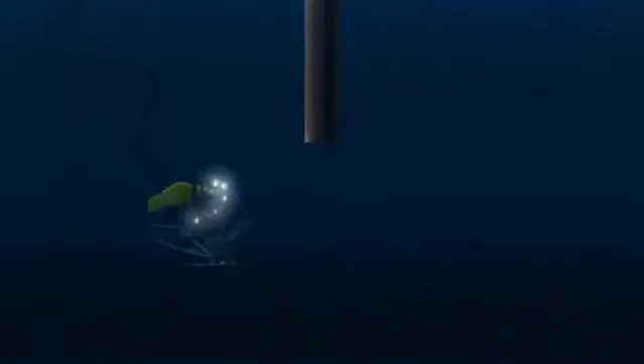Offshore drilling rigs have all the functions of onshore rigs, but also need to stay on station in a variety of sea states and allow for secure connections between the surface and the sea floor. To start an offshore well, a thick-walled, large-diameter hollow tube called a conductor is embedded in the sea floor, with the aid of a bit that jets away the sediment with high-pressure seawater.

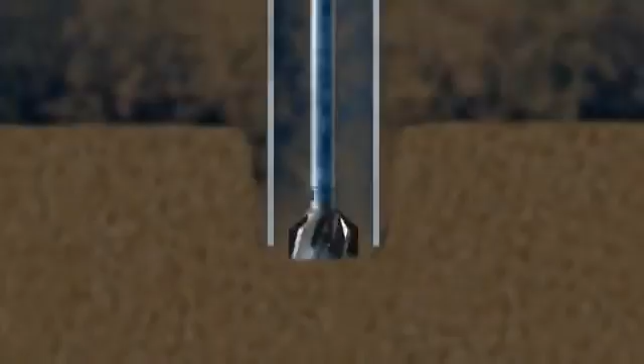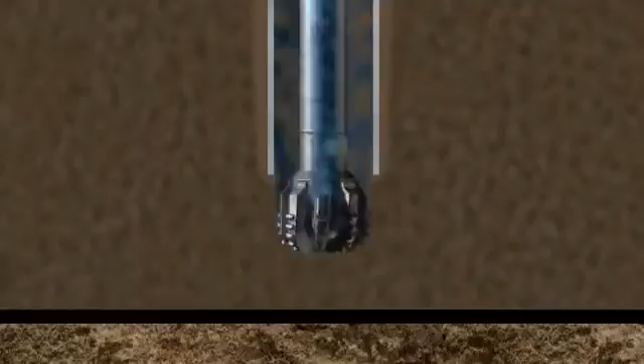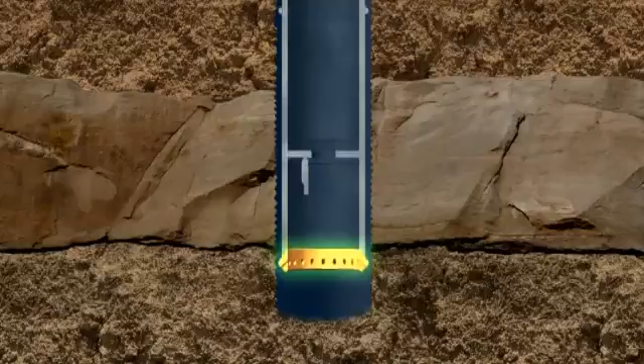When the conductor has penetrated about 250 feet, the jet bit is retrieved and a drill bit introduced. The cuttings are just washed to the top of the well by seawater pumped through the bit. A second run of conductor is now lowered into the hole. At the bottom of the conductor is a guide shoe that stops the conductor snagging on the well bore. Above the shoe is a flap valve called a float collar.

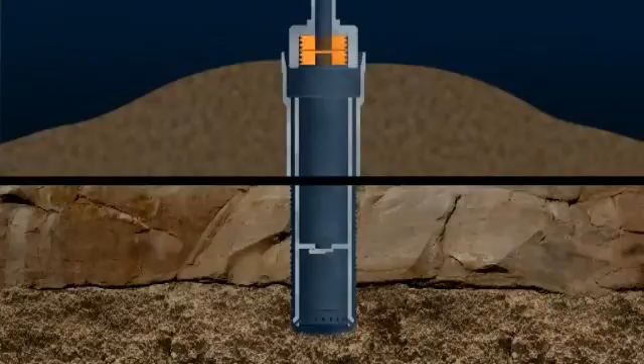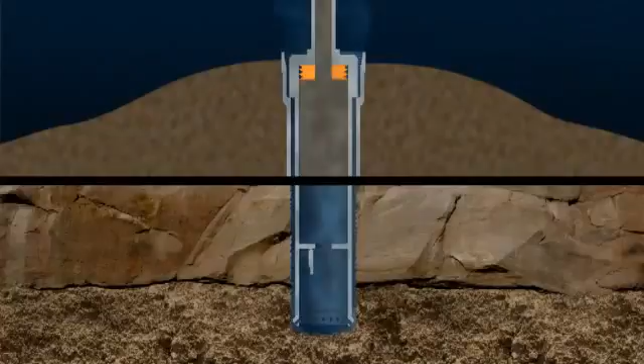A cementing tool is connected to the top of the conductor. A plug that pushes the seawater out is driven downwards by high-pressure cement that fills the conductor. On reaching the float collar, this plug is ruptured, and cement flows out of the bottom of the conductor and up the annular space between the wellbore and the conductor.

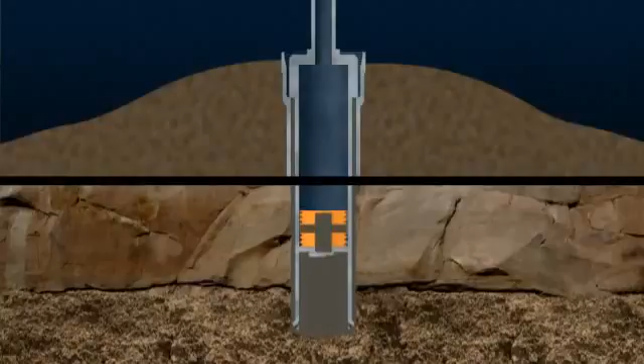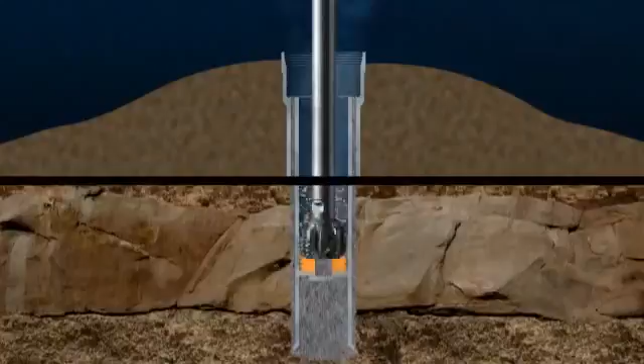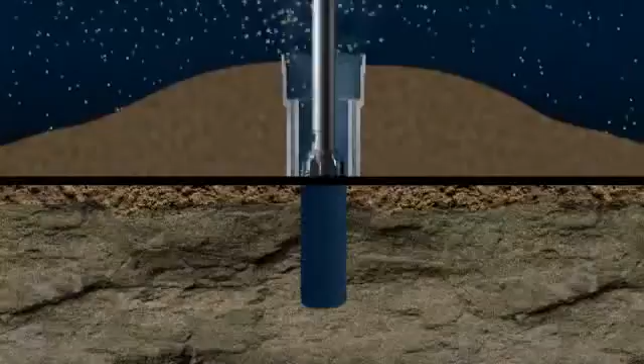The cement plug tool is removed, and when the cement has set, drilling continues with a smaller diameter bit, penetrating the cement plugs and float collar and into fresh rock. After a suitable depth has been drilled, the drill string is removed. Then steel tubing, known as casing, is lowered into the hole and cemented in place. This first casing run has an attached wellhead.

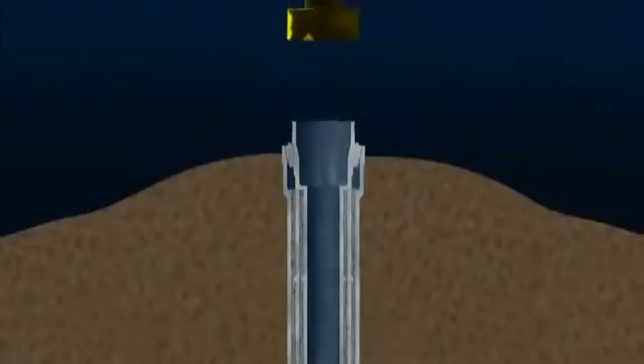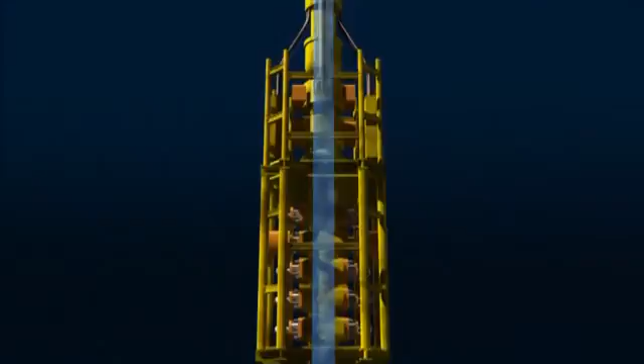A blowout preventer, BOP, a robust set of valves that can shut in the well even if the drill string is down the hole, is then lowered and locked onto the wellhead. The BOP is connected to the sea surface by large diameter tubing known as a riser, which allows drilling fluids to be returned to the surface. From this point onwards, the drilling procedures are similar to those used to drill an onshore well.

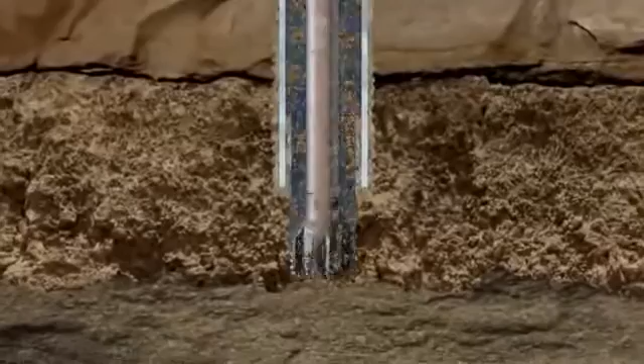With the riser in place, seawater is replaced by a special fluid known as drilling mud that is pumped down the string and exits through ports in the bit. The mud not only cools the bit, but also clears the cuttings from the hole. The cuttings are captured at surface and examined by geologists to characterize the rock types that are being penetrated.

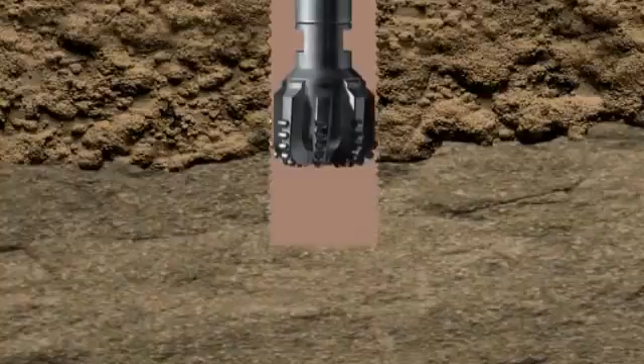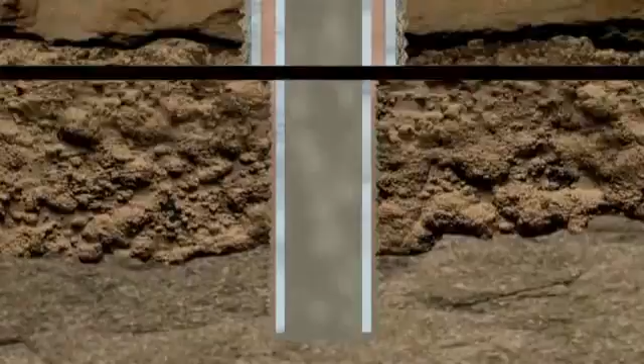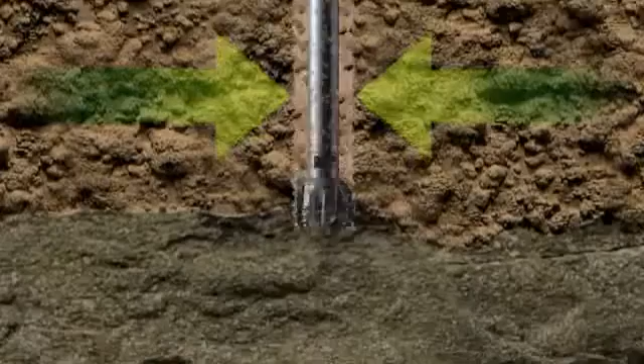As drilling continues, sets of decreasing diameter bits and casing runs are used as the well penetrates deeper into the rock. Each run of casing is cemented in place to provide integrity, a sealed system from top to bottom. The density of the mud is controlled by the mud engineer, adding dense minerals when needed. The aim is to produce a column of dense mud which exerts sufficient pressure in the well to counteract pressure from fluids encountered in the rock.

This combination of the dense mud column, contained in properly cemented casing, aims to control pressures in the well. The BOP provides a further level of security. When the well penetrates a potential reservoir rock, the oil or gas may be detected by analyzing the drilling cuttings for traces of gas and/or oil. At this stage, it is essential to gather as much information as possible about the reservoir. Two methods provide most of the information.

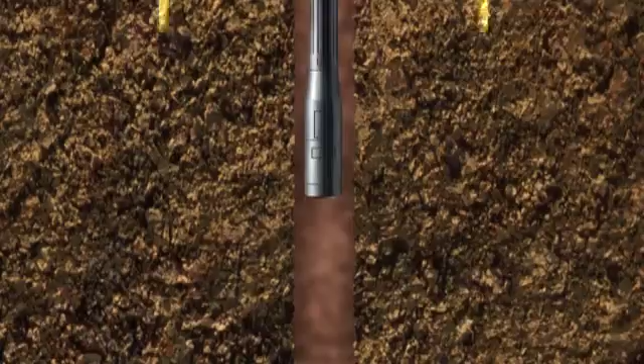In the first, the drill bit is replaced with a diamond-studded coring bit at the bottom of a core barrel. This can cut a complete section of the reservoir rock and return it to surface for detailed analysis. In the second, coring may be replaced or complemented by running a suite of geophysical logging tools, which are run on electric wire line. These are instruments that can measure the physical properties of the rocks as they pass slowly through the well bore.

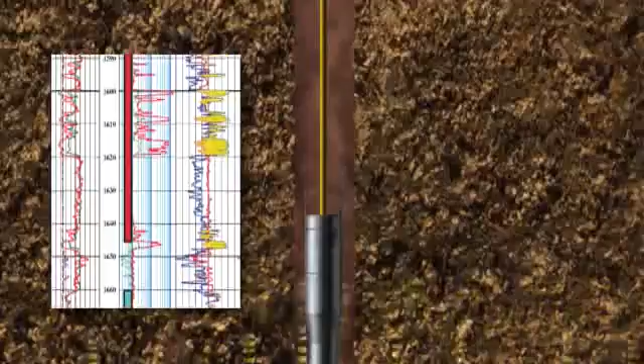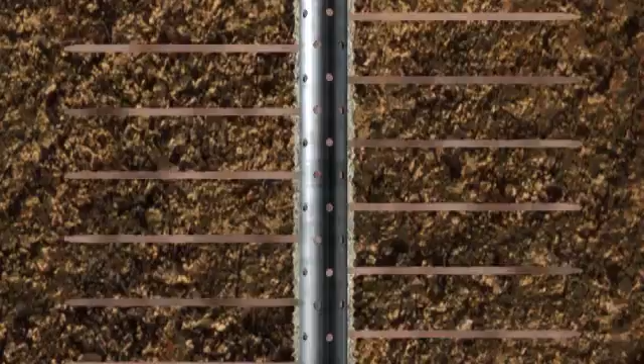When as much information as possible has been gathered from the reservoir, a decision is made on whether to complete the well for production, suspend efforts with the option to return to the well at a later date as more information on the reservoir becomes available, or to plug and abandon the well. If the well is seen to have production potential, the reservoir interval is lined with casing. The casing is then perforated to allow reservoir fluids to enter the well and travel up the installed completion production string to surface.